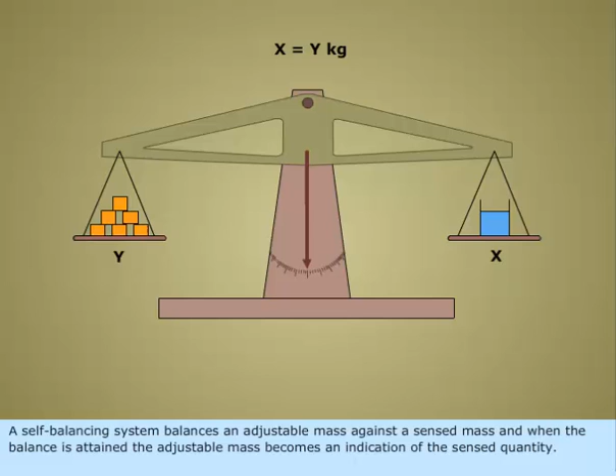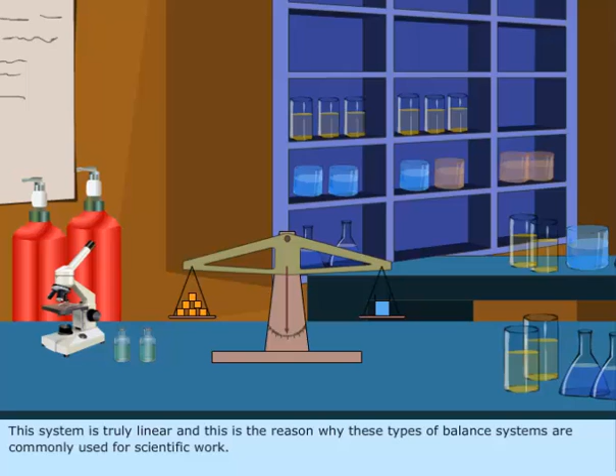This system is truly linear, and this is the reason why these types of balance systems are commonly used for scientific work. The only thing is that the scale pointer needs to precisely sense the equality between known and unknown masses.

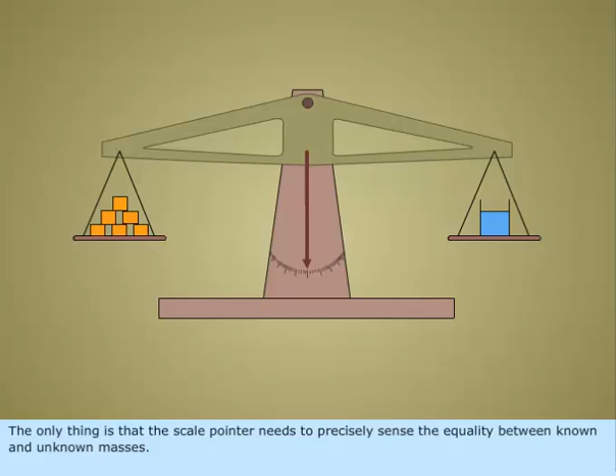In pressure instruments, pressure is made to act on the surface area of a sensing element like diaphragm or bellows. By the way, the pressure is simply transformed into force, and this makes a force balance pressure instrument.

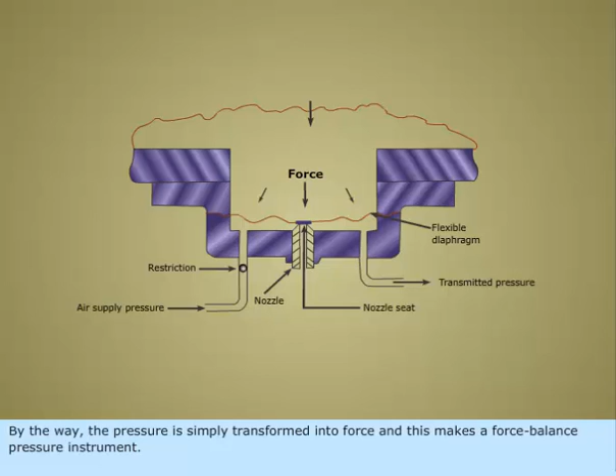The force balance pneumatic pressure transmitter balances a sensed differential pressure with respect to an adjustable air pressure, which turns out to be a pneumatic output signal.

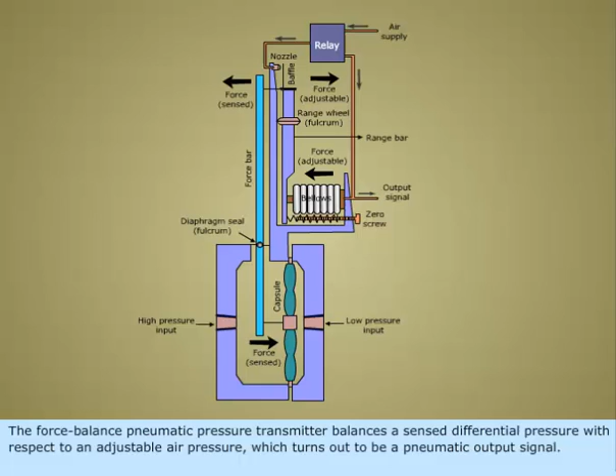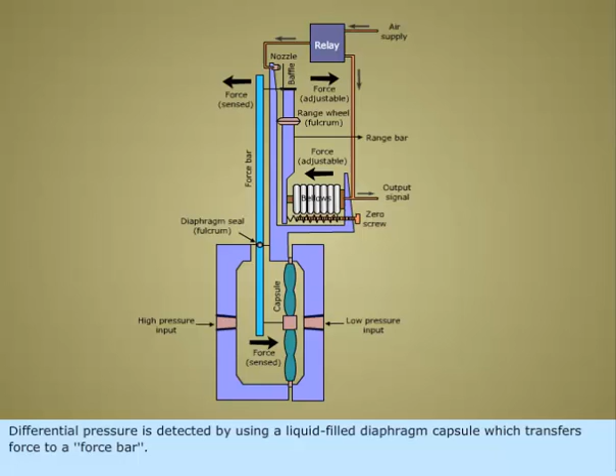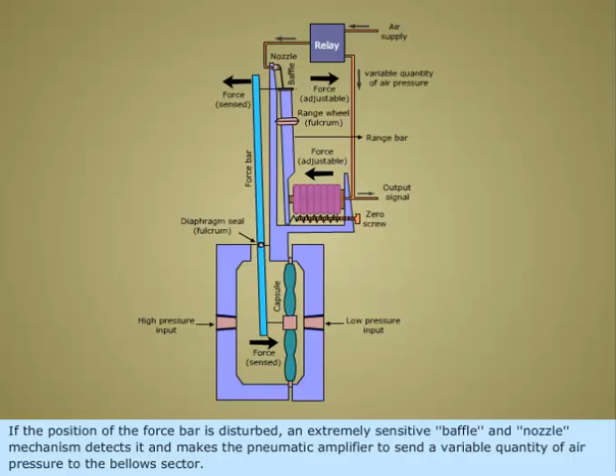Differential pressure is detected by using a liquid-filled diaphragm capsule, which transfers force to a force bar. If the position of the force bar is disturbed, an extremely sensitive baffle and nozzle mechanism detects it and makes the pneumatic amplifier send a variable quantity of air pressure to the bellows sector. The bellows presses against the range bar, which pivots to neutralize the starting motion of the force bar.

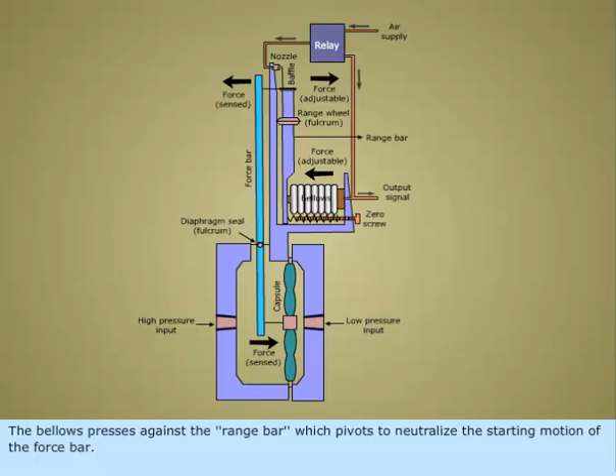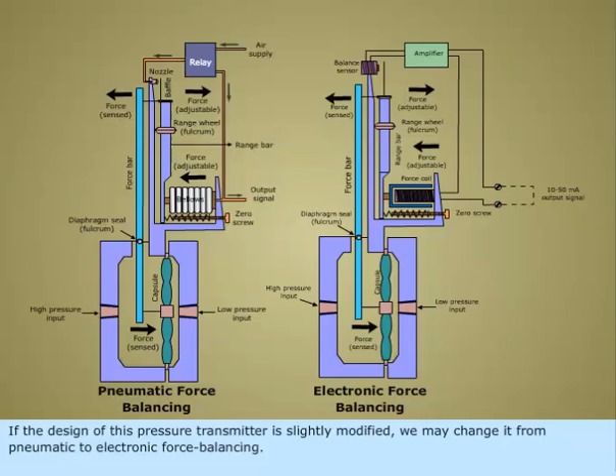If the design of this pressure transmitter is slightly modified, we may change it from pneumatic to electronic force balancing. Differential pressure is also detected by using the same type of liquid-filled diaphragm capsule that transfers force to the force bar.

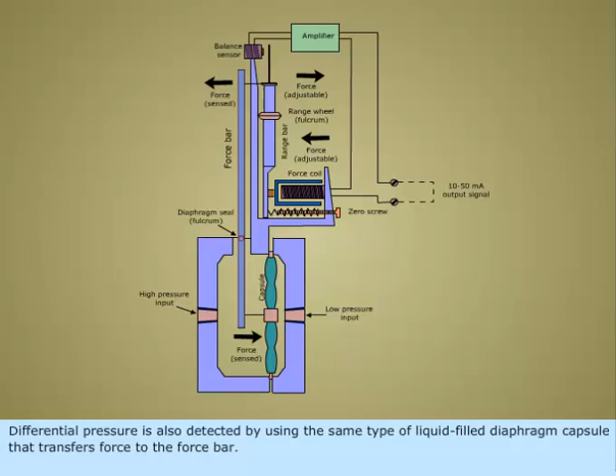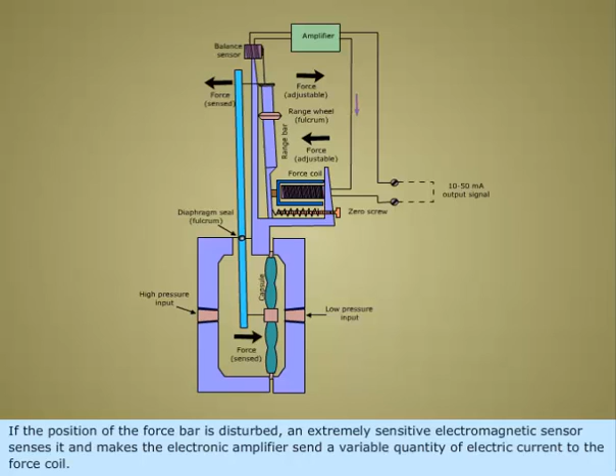If the position of the force bar is disturbed, an extremely sensitive electromagnetic sensor senses it and makes the electronic amplifier send a variable quantity of electric current to the force coil. The force coil presses against the range bar, which hinges to neutralize the starting movement of the force bar.

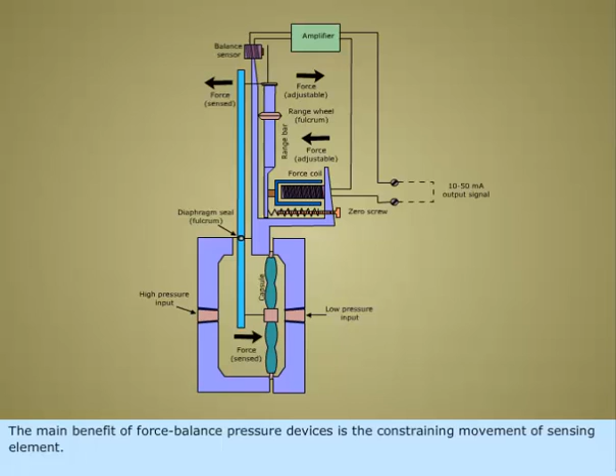The main benefit of force balance pressure devices is the constraining movement of the sensing element.

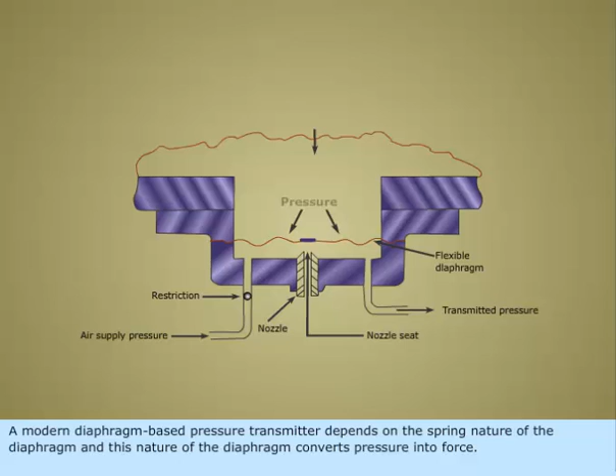A modern diaphragm-based pressure transmitter depends on the spring nature of the diaphragm, and this nature of the diaphragm converts pressure into force. Then this force is further converted into motion, which in turn is detected and converted into an electronic signal.

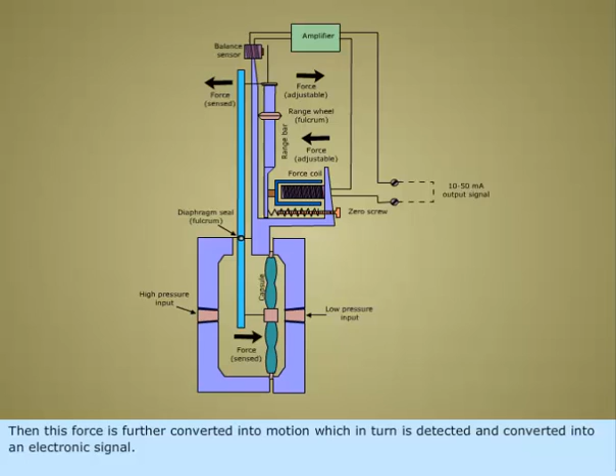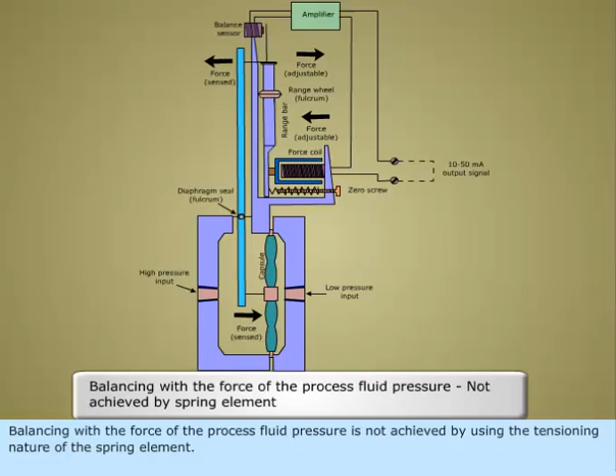Balancing with the force of the process fluid pressure is not achieved by using the tensioning nature of the spring element. It is successfully done by using either an adjustable air pressure or an adjustable electric current.

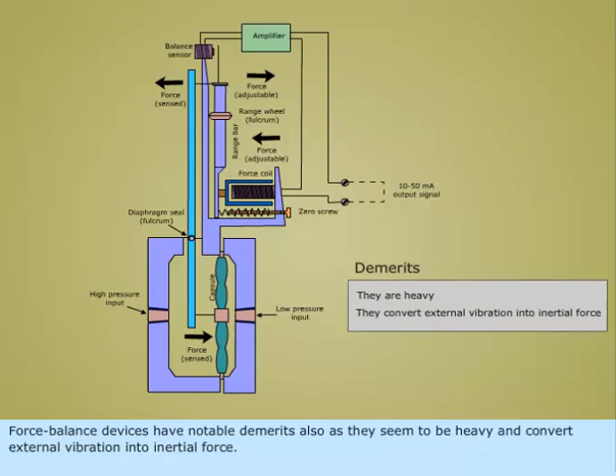Force balance devices have notable demerits also, as they seem to be heavy and convert external vibration into inertial force. Also, the quantity of electrical power required to offer sufficient balancing force is such that it is almost not possible to limit below the level required to safeguard intrinsic safety.

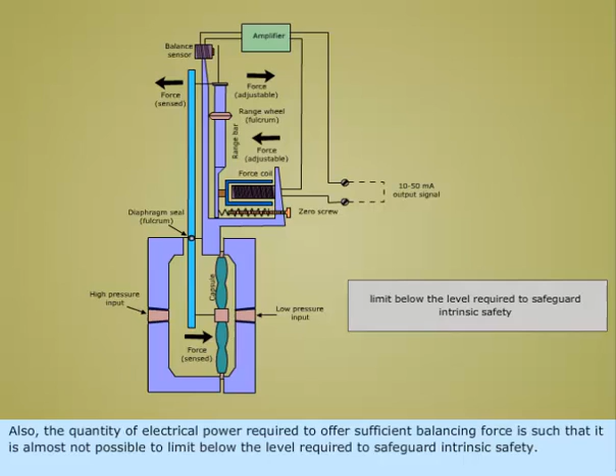Force balance pneumatic transmitters.

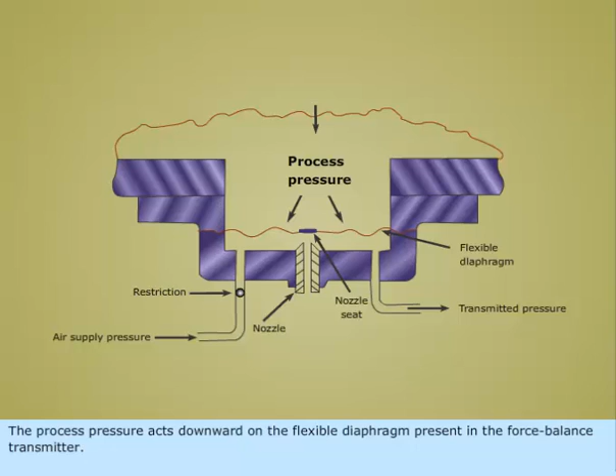The process pressure acts downward on the flexible diaphragm present in the force balance transmitter. The resultant force is balanced by the back pressure of the nozzle that acts upward on the diaphragm.

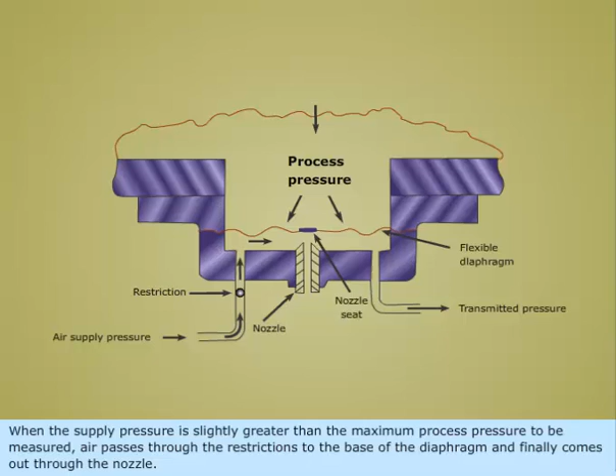When the supply pressure is slightly greater than the maximum process pressure to be measured, air passes through the restrictions to the base of the diaphragm and finally comes out through the nozzle. At stable state, the nozzle seat clearance is such that the air flowing in the nozzle and the air flowing through the restrictions to the base of the diaphragm are the same.

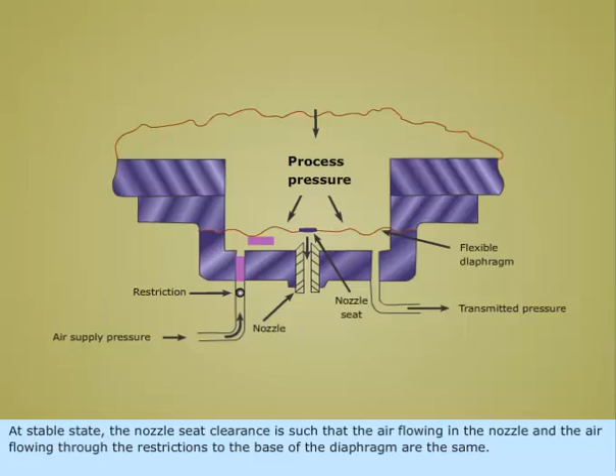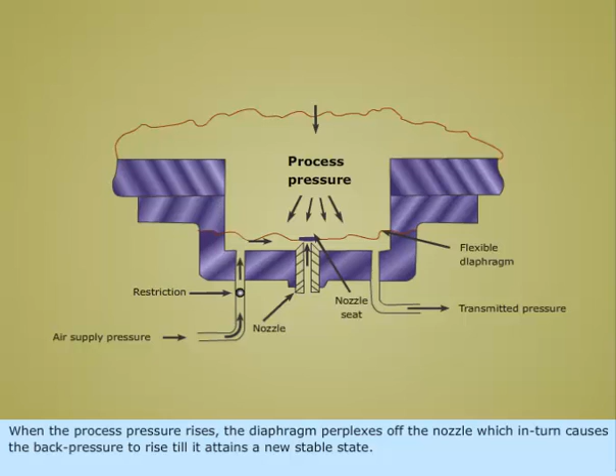When the process pressure rises, the diaphragm moves closer to the nozzle, which in turn causes the back pressure to rise till it attains a new stable state. When the process pressure falls, the diaphragm moves away from the nozzle, which in turn causes the back pressure to fall till the stable state is re-established.

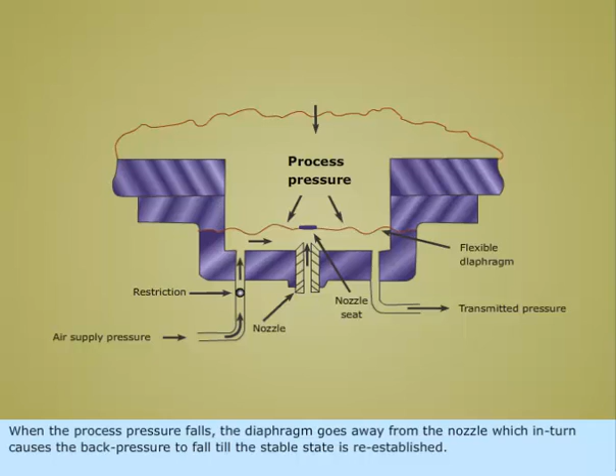Since the back pressure of the nozzle is connected directly with the process pressure, the signal can be used for indication, recording, or control.

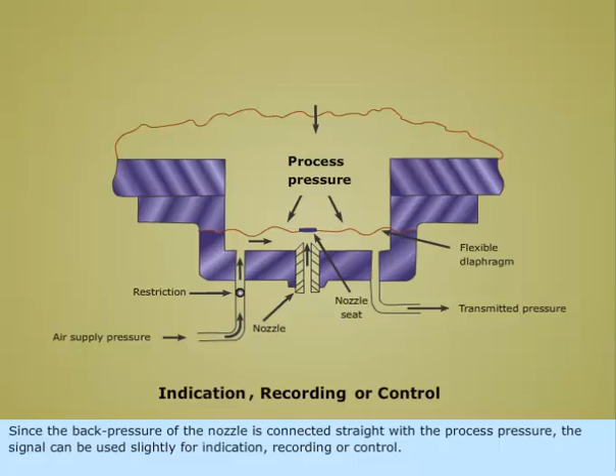Merits: such types of transmitters are precise.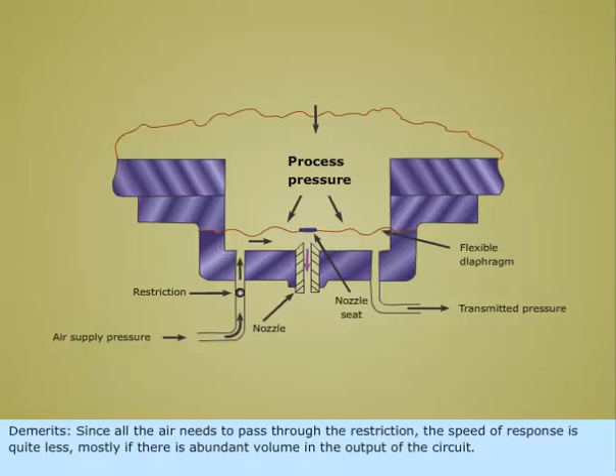Demerits: since all the air needs to pass through the restriction, the speed of response is quite less, mostly if there is abundant volume in the output of the circuit. Any leakage in the output side creates an error or even makes the entire unit defective.

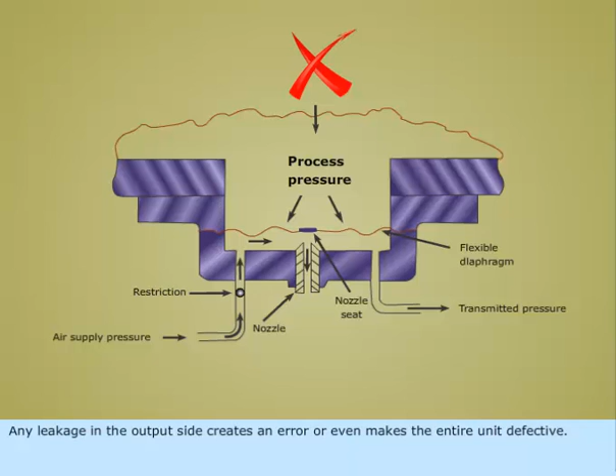In order to overcome the above discussed disadvantages, a refinement is designed by using a volume booster and constant differential nozzle circuit.

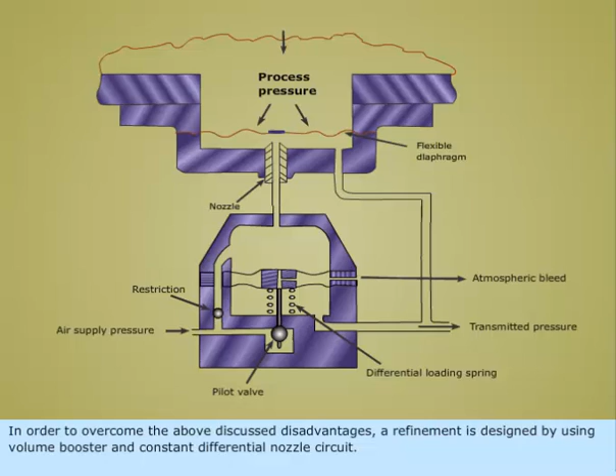The volume booster has an exhaust diaphragm assembly and has two diaphragms that can move essentially and offer a bleed to atmosphere.

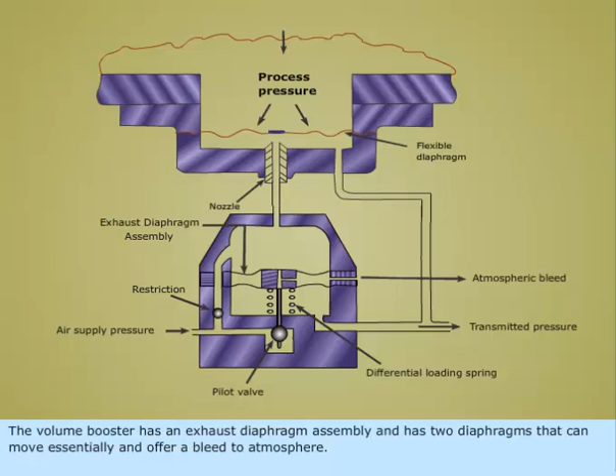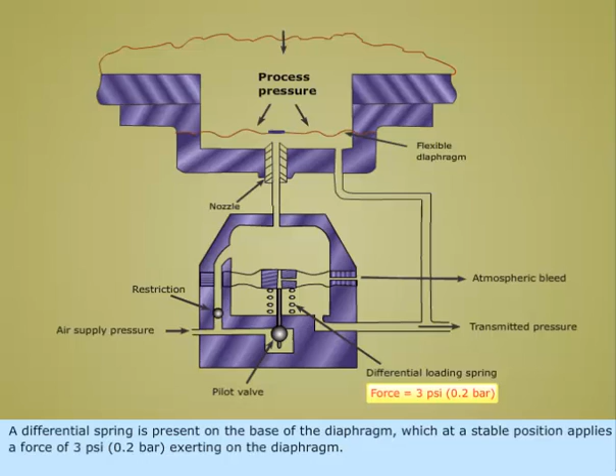A differential spring is present on the base of the diaphragm, which at a stable position applies a force of 3 psi, 0.2 bar, exerting on the diaphragm. As a result, the nozzle back pressure acting overhead the exhaust diaphragm is always technically 3 psi, 0.2 bar, greater than the transmitted pressure.

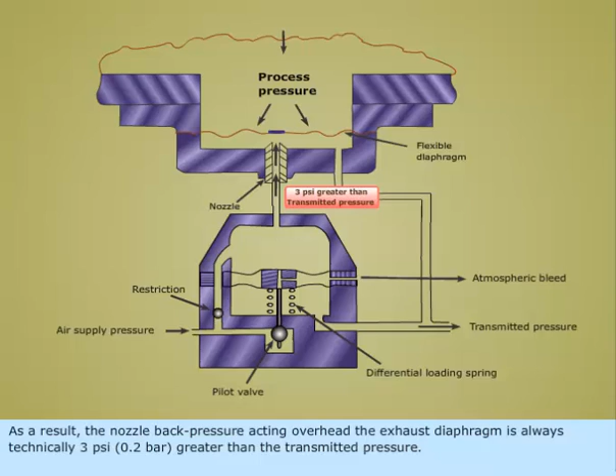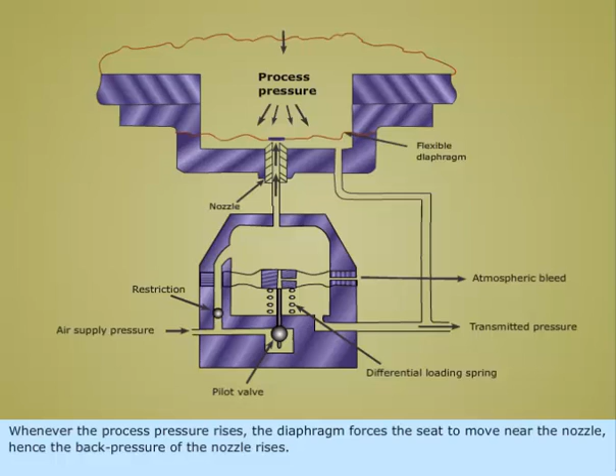Whenever the process pressure rises, the diaphragm forces the seat to move near the nozzle, hence the back pressure of the nozzle rises. This rise in back pressure forces the exhaust diaphragm to move downward, closing the exhaust port, which in turn forces the pilot valve to move downward, and thus the supply port is opened.

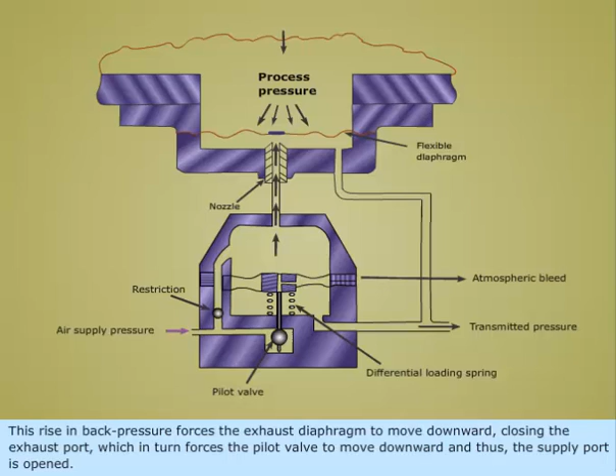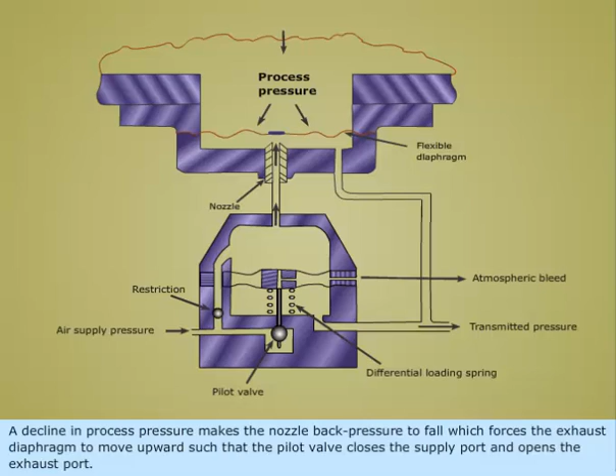A decline in process pressure makes the nozzle back pressure fall, which forces the exhaust diaphragm to move upward such that the pilot valve closes the supply port and opens the exhaust port. This causes the transmitted pressure to fall till the stable state is reached.

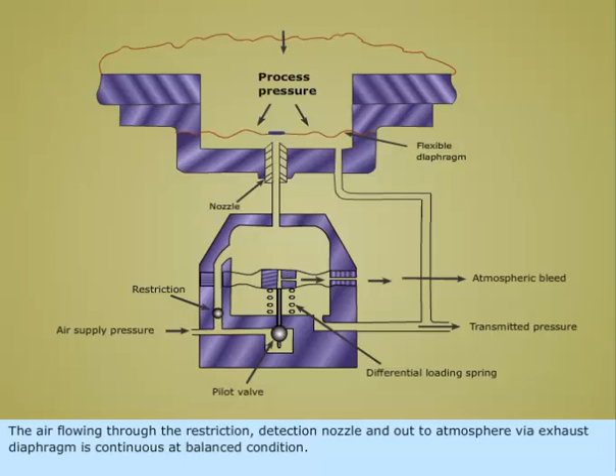The air flowing through the restriction, detection nozzle, and out to atmosphere via the exhaust diaphragm is continuous at balanced condition. Thus you have learned about force-balanced transmitters.